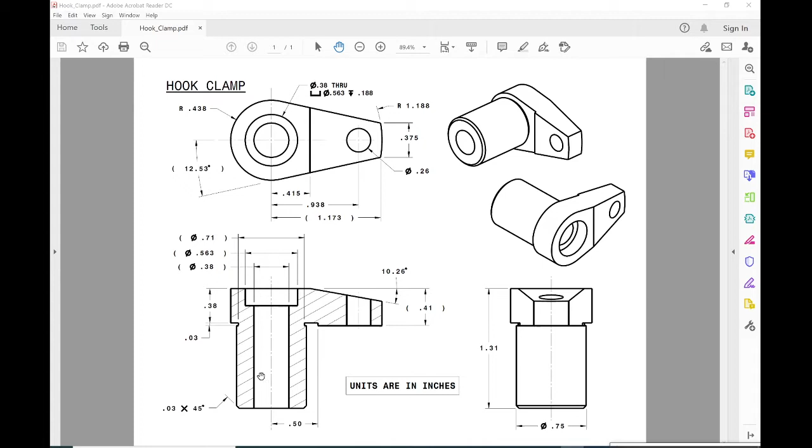Hook clamp. Okay, we're going to start by working on this sketch here. We'll draw this portion of the hook clamp first, then focus on the shaft, and at the end we'll draw the counterbore hole and this simple hole.

Okay, so let's take a look at the sketch. When we do our sketch, we're going to draw our arc about the origin, with a radius of 0.438. Let's go to CATIA and draw a sketch on the XY plane.

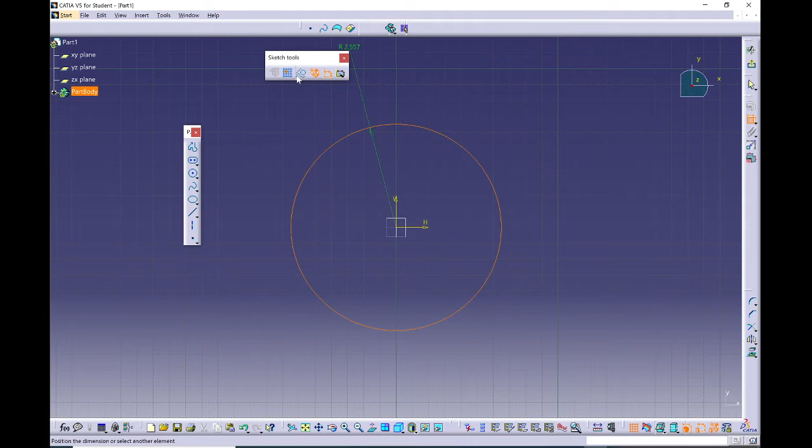We're going to draw a circle at the origin. Let's add a dimensional constraint. Double click on it. If yours is set to diameter, switch down here to radius and type in 0.438. There it is. Let me zoom in.

All right, let's go back to the PDF file. The next thing we're going to draw is these lines. We have angles, but they're in reference, so we're just going to draw lines and use these dimensions to define them. Let's go back to our sketch.

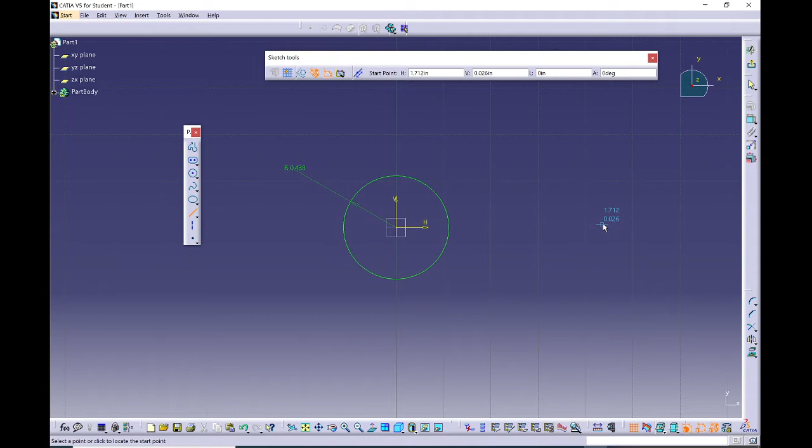I'm going to use the line command and just guesstimate the location. I'm going to overextend, click, then go tangent to that line or to the circle. There it is, and let's repeat the same thing on the bottom. It's not going to be exact at first, but we'll fix it with our constraints. Then barely touch the circle so it'll create a tangency constraint. And there it is.

Okay, now maybe you haven't used the eraser command. Let's dock these toolbars back into place. Here we have the eraser. I'm going to double click on it. Oh, I only clicked once—let me deselect, double click. I'm going to do multiple erase deletes, just double clicking on the eraser. I'm going to remove this portion of the arc, remove that portion, and this portion. We could have also used trim extend, but I wanted you to be aware of this eraser—it's a quick delete command.

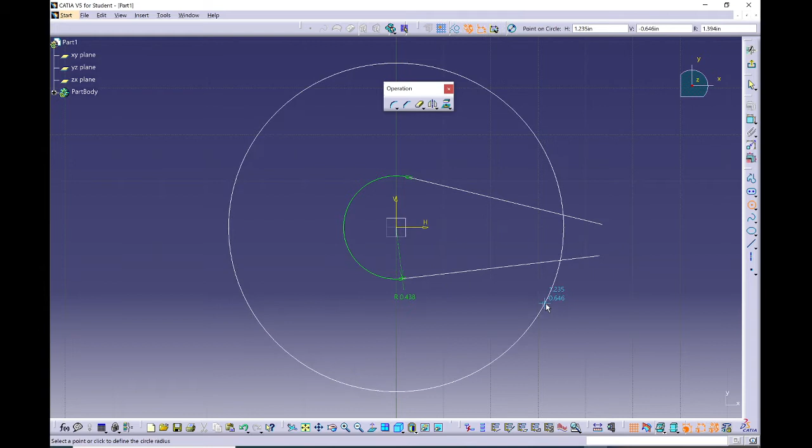All right, let's go on to the end of this. Let's go back to the drawing. We have a radius of 1.188. Let's draw a circle at the center with a radius of 1.188. Now let's draw the next circle at that same center point, typing in a radius of 1.188 and enter.

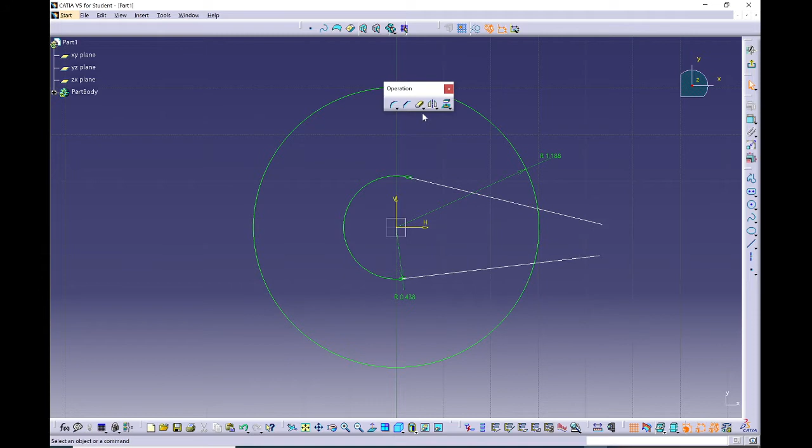Okay, so now we can do the same thing with the eraser. Double click, remove the portions you don't want. I misclicked, let's double click again. There it is. We don't want this portion, nor this portion. Okay, hit escape to deselect.

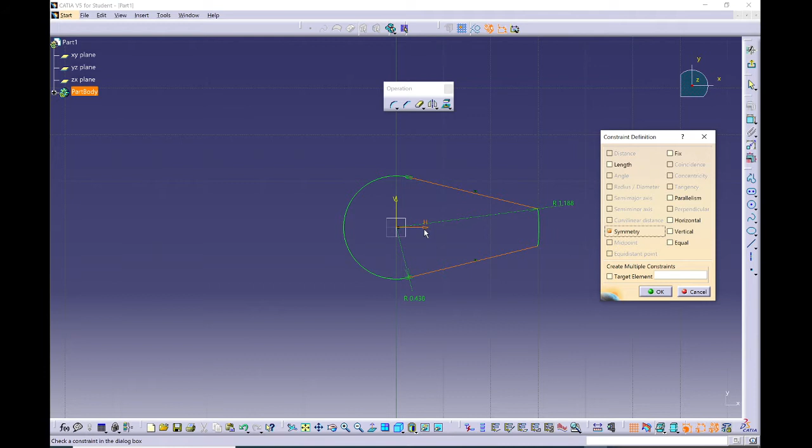One thing I'm missing is I need symmetry between these two lines with respect to the horizontal axis. In case you weren't aware, H stands for horizontal axis and V for vertical axis, and the intersection is the origin. Now I'm going to pre-select these two lines, and lastly select the line of symmetry, which is the horizontal axis. Then I'll apply a symmetry constraint, and there it is—it added the symmetry constraint. Always pick your elements first while holding the control key, and select your line of symmetry last.

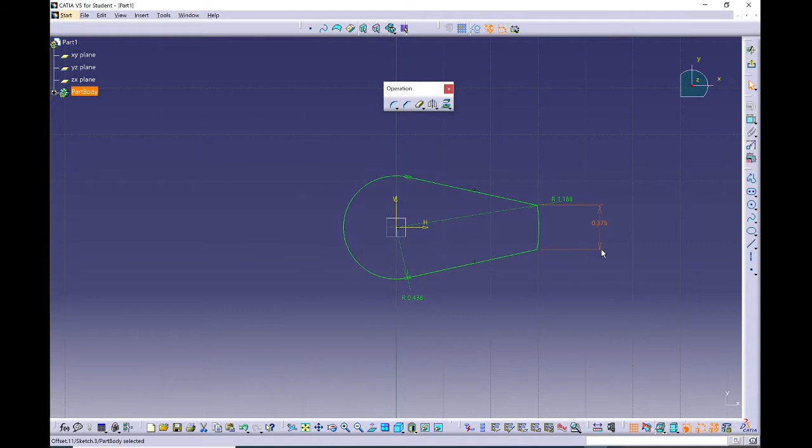Now let's add our dimension of 0.375, from this point to this point, and enter. There it is—that's all we needed for this sketch. Let's do a tool sketch analysis just to double check everything looks good. Everything's closed, as you can see. Let's go ahead and exit.

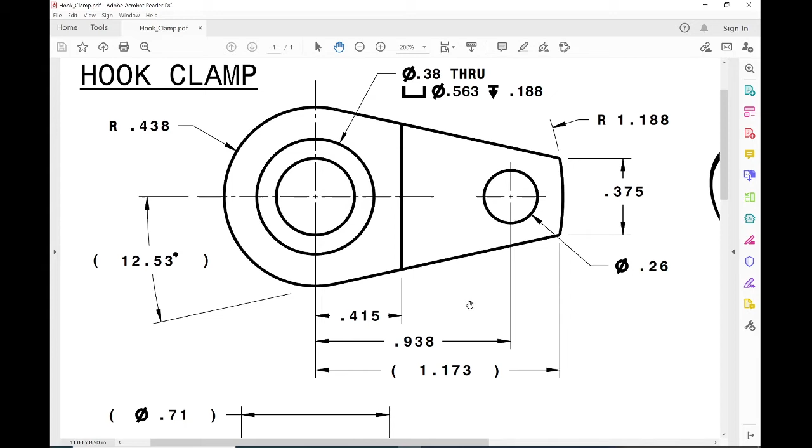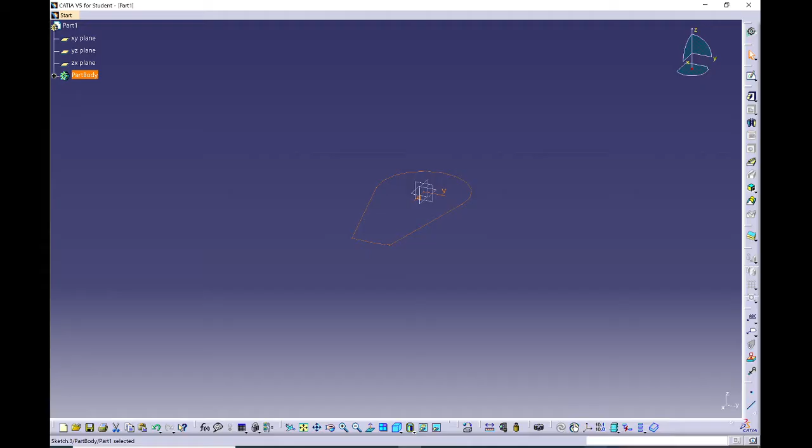All right, now I'm going to do a pad. This tells us it has an overall height of 0.41. So I'm going to pad 0.41, which is just 0.38 plus 0.03, equaling 0.41. This is in parentheses as a reference because it would be double dimensioning with respect to these two dimensions. So we'll do a pad of 0.41.

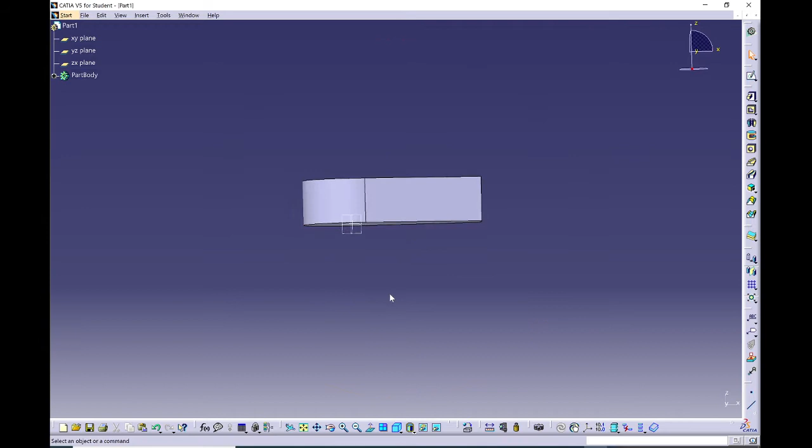Okay, there it is. Let's rotate. Again, I'm trying to use the axis here for later, for using other commands where we can use symmetry and rotate about this axis when we create our shaft. All right, now let's focus on this view.

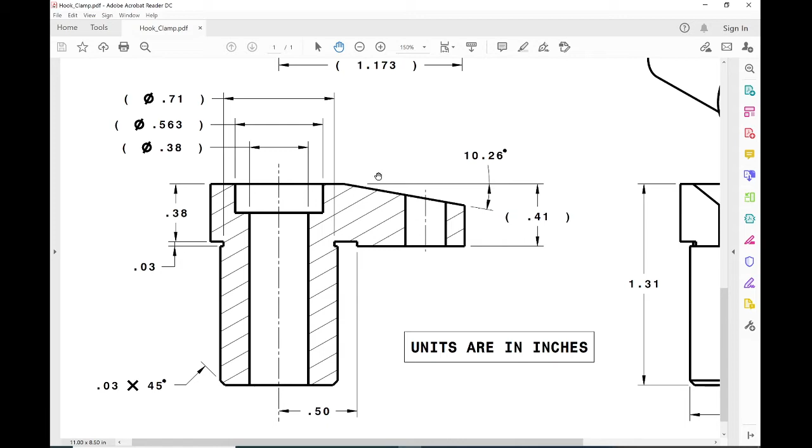Okay, so I need to create this cut here, and I'm going to create a cut here. I'm going to draw a rectangle to remove this portion of it, and then I'm going to draw a triangle to remove this portion of the pad. Okay, so let's start with this one. We're going to need help from the top view.

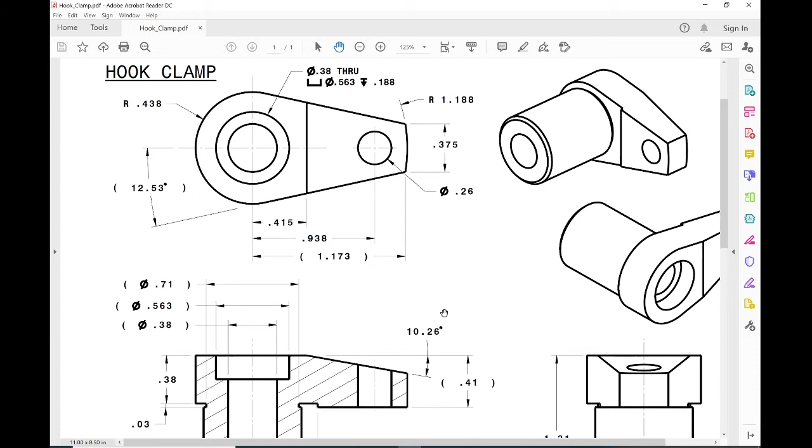All right, so we're going to draw a triangle, which is 0.415 from the axis. So from this axis to this point is 0.415. Okay, and then we're going to go downward at an angle of 10.26.

All right, so we're going to draw a sketch on this plane so we can remove this portion, and then we'll come in and do a rectangular cut all in one sketch. Okay, so let's go ahead and sketch.

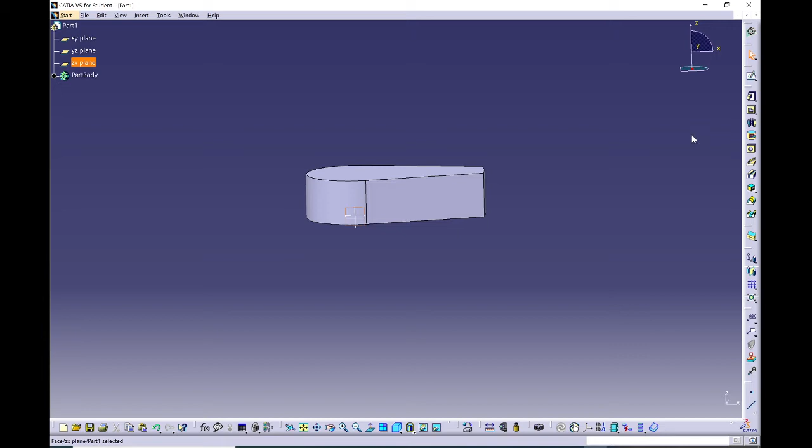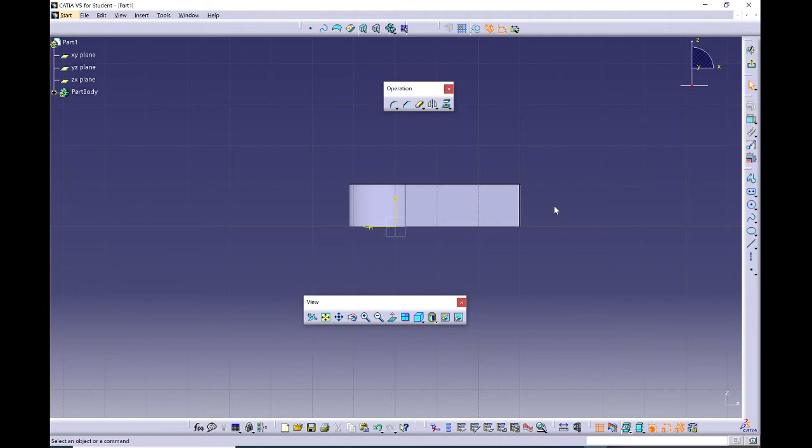Now I want this on the other end, so I'm going to hit the normal command. Normal view, click on it, it'll straighten it out. Click on it again and it'll rotate it. As you can see, it flipped it 180. Okay, so we're going to draw that triangle. Double click to dock it back in place.

Okay, so I'm going to draw a triangle. I'll use the profile command. I'm just guessing on the dimensions. Okay, there it is. Click in space to deselect.

I'm going to project this edge. Okay, so let's use project. And click in space. Now I don't want this projected element to be a solid line, so I'm going to select it, turn it into a construction line. All right, and click in space to deselect.

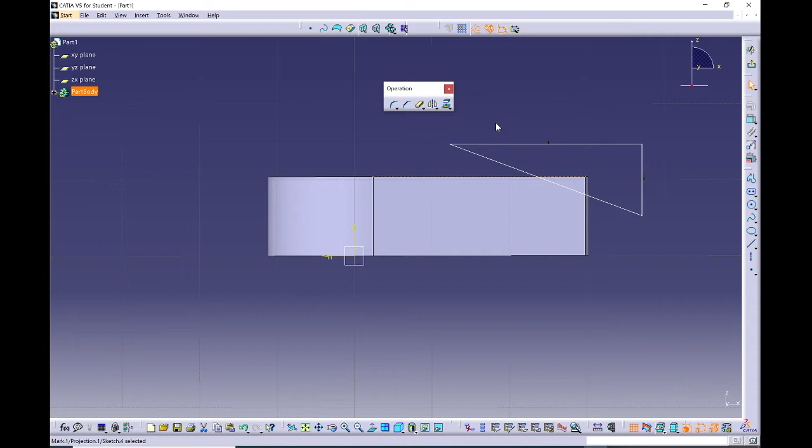So you can see there's a construction element. Let me zoom in a little bit. Click and space. Okay, so we have this construction element, and we're going to put a relationship between that construction element and the horizontal line, and we're going to make it coincident. There it is.

Okay, and then we're going to add a dimension from our vertical to this point. Let's take a look at the drawing again. Okay, so that dimension is 0.415 from the axis to where the slope starts. So from the axis to this point, 0.415. So let's put that dimension from the vertical to this point, and it's 0.415.

And enter. Okay, now we need the angle. Angle is 10.26. Okay, so let's add the angle of 10.26 degrees. Ooh, I misclicked. Let me hit escape. Do it again, from the horizontal to the slope. Double click, and 10.26 is our angle.

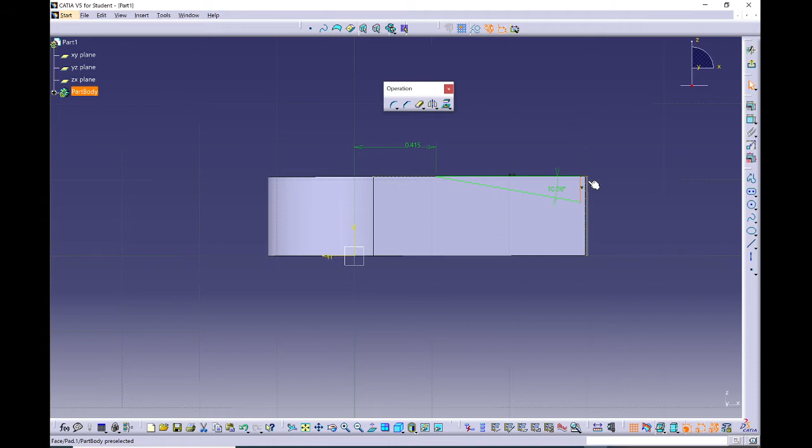Okay, and there we have it. Now notice this is still white, meaning I can extend it. It's okay if we overextend it, it's a pocket. We're going to create a pocket. There's no solid in this area, so this part it'll ignore when I do a pocket. So this length doesn't really matter as long as it's not smaller than the overall length, or as long as it doesn't stay within this edge. We want to go beyond that edge.

Let's go ahead and throw in a dimension, and I'll just type in 1 inch. Okay, so there's our triangle.

Okay, now we're going to do a rectangular profile here, to do the cut, that's right here. Okay, so let's draw a rectangle. Go to rectangle.

We're going to go slightly above. Oh, notice I forgot to get out of construction. I'm going to have to hit escape to exit the command. I forgot to turn off the construction option. Turn it off. Now let's draw a rectangle again.

I'm not going to go to this edge. I'm going to go a little higher because we're going to remove that portion of it. Okay, there it is. All right, so let's go get some dimensions.

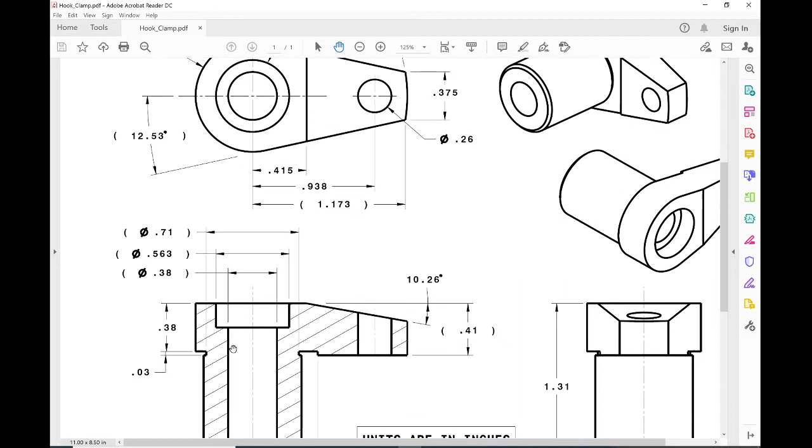Okay, so we're going to remove this portion of it, which is 0.03. So 0.03, and then we're going to put a dimension of 0.50 from the axis to this point.

Okay, so we're going to put a dimension from the horizontal to this line. Dimension. There it is, to the horizontal. And let's change it to 0.03. So that's the undercut, 0.03.

Then a dimension from the vertical axis to this vertical line. Let's take a look at that dimension again, which is 0.50.

Okay, 0.50, enter, there it is. Now the length of this doesn't really matter as long as we go through the solid. So it can be this short, it can be longer. We don't want it inside the solid because we're removing this entire portion of it.

Okay, so let's extend. I'm going to just throw in some dimensions. Doesn't matter, I'll go 0.25 on this one. And for this length, I'll just type in 1. It doesn't matter.

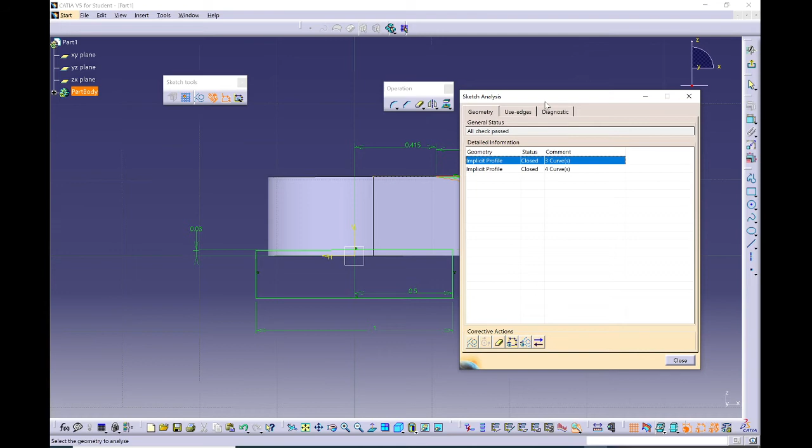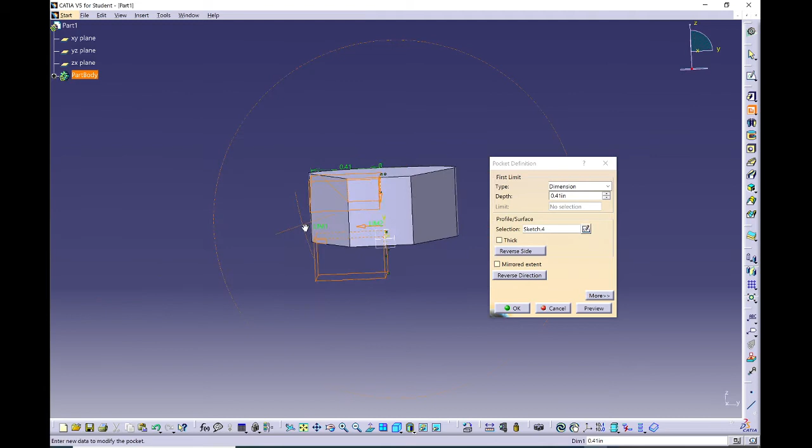Close, let's exit, and let's do a pocket. Okay, so as you can see, we have our sketch. Let's do a pocket. And as you can see, it's going to cut through the solid. I don't know how much length I need, so I'm going to just type in 1. Preview, it's okay if you overcut.

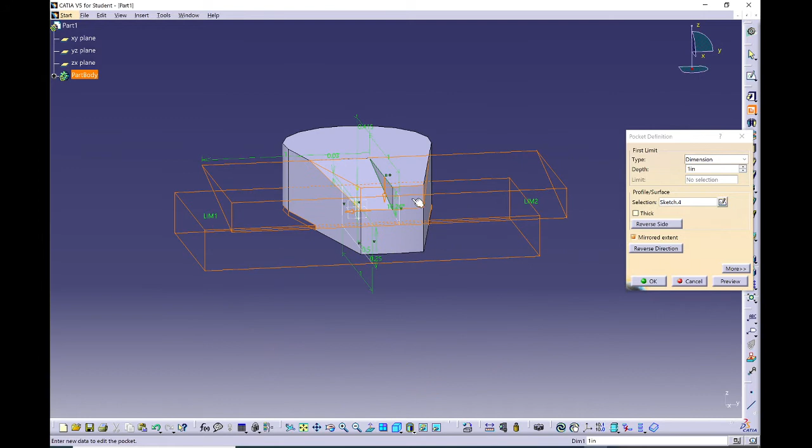Notice it's only cutting one portion of it, so we need to also go with mirror. If we click on the mirror option, it'll also cut in the other direction. There it is, so it's going 1 inch in each direction, and hit OK. And there it is, so we have our pocket and our pocket.

Okay, so there's our top portion of the hook clamp. Now what we need to do is create our shaft. So let's take a look at the shaft.

Okay, so we're going to draw this profile. We have a shaft with a diameter of 0.75. We have a diameter of 0.75, and we're going to draw this profile. We're just going to do it with a rectangular shape, and then we'll revolve.

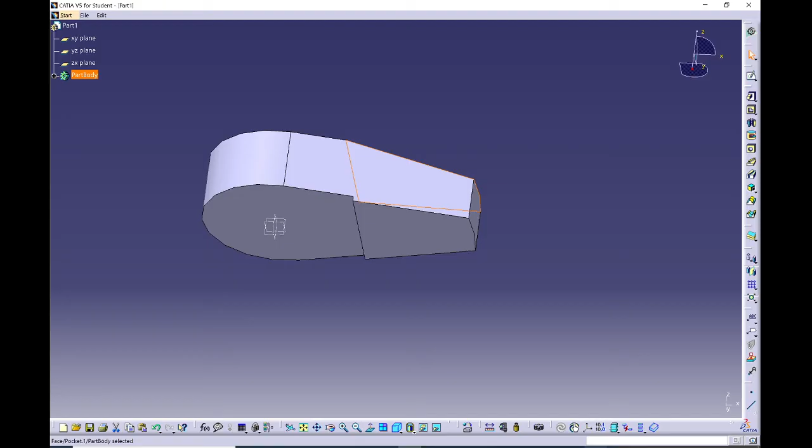Okay, so just like the last sketch, we're going to sketch on this plane, which is the ZX plane. Create a sketch. Let me hit normal to rotate it 180. There it is.

All right, so we're going to draw this. I'm going to project this over, grab this edge, project, hit OK, and change it to a construction element. Click in space to deselect. You can see it's a construction element. Once you deselect it by clicking in space or hitting escape, go back and turn off the construction option.

All right, so let's go ahead and draw that profile. Okay, let's go back, so we're going to draw this profile. And for now, we'll just guesstimate the size. So we're only going to draw the left hand, we don't need to draw the right hand.

We're going to do a revolve. So let's use profile. For now I'm just guesstimating the location. Let me go ahead and zoom in.

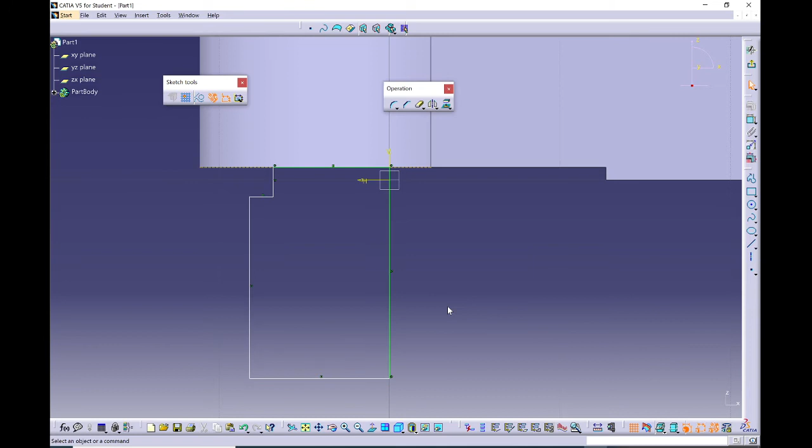We'll come back and take care of the chamfer. Go all the way to the middle, make sure it's horizontal. Okay, and there it is, we have a closed profile. Click in space to deselect or hit escape.

Okay, so we know this is an undercut of 0.30. Okay, so the undercut is 0.30 — my mistake, 0.03. Enter, there it is.

We know the diameter, if we go back to the drawing, is 0.75. We're going to cut it in half because we're only drawing half of it. So let's go ahead and throw in that diameter. It's going to be 0.75 divided by 2. So I'm going to double click, type in 0.75 divided by 2.

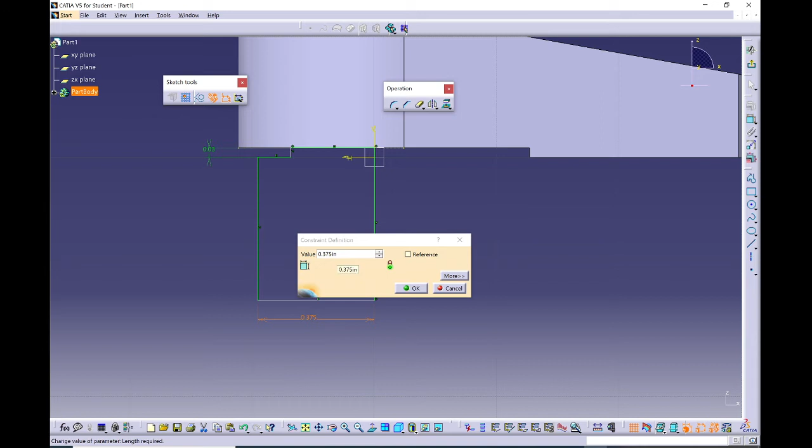Let's see, clicking away. Oh, let me type it in again. 0.75 divided by 2. Try it again, click away. There it is, 0.375. So I inputted the wrong number earlier. It's 0.75 divided by 2, which is 0.375, and OK.

All right, now we need an overall length, and we also need the location for this one. Let's go back to the drawing. Overall length is 1.31. So let's throw in a dimensional constraint from the top to the bottom of 1.31.

Enter, there it is. And we still need to locate this line here. Let's zoom in a little bit. Okay, we still need to locate this line. All right, so...

Here it is, we have a dimension of 0.71. So we're going to take 0.71 — that's the diameter from here to here — and divide it by 2.

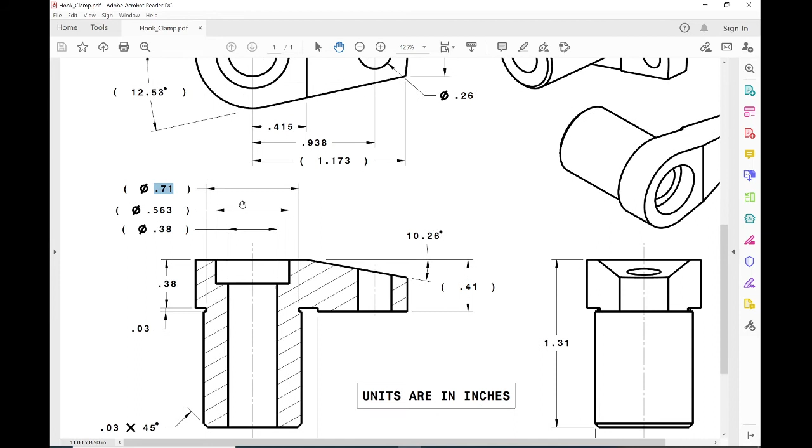Okay, so let's throw in that dimension of 0.71. Double click, type in 0.71 and divide by 2. Click away, let CATIA do the math for you. So it's 0.355, and OK.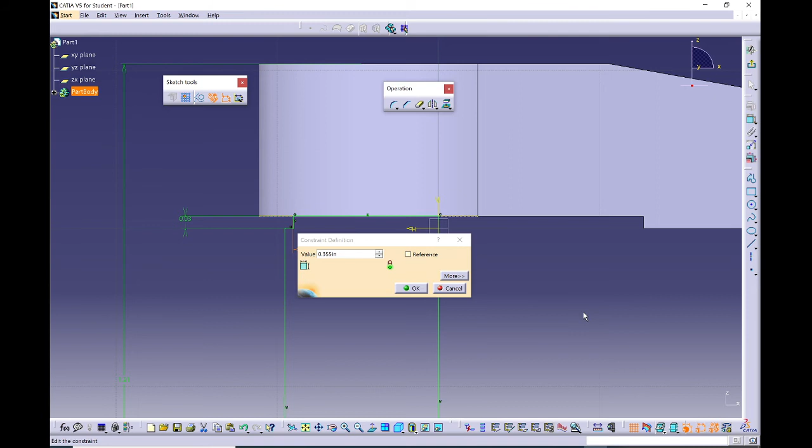And there it is, we have our sketch. Do a tool sketch analysis — everything is closed and we're good.

Okay, now when we exit the sketch, we're going to do a revolve about the vertical. Let's find it in the tree, this vertical axis, right click, center graph. There it is. So here's our sketch, here's our vertical. We're going to revolve around this vertical axis. Let's go ahead and exit the sketch now.

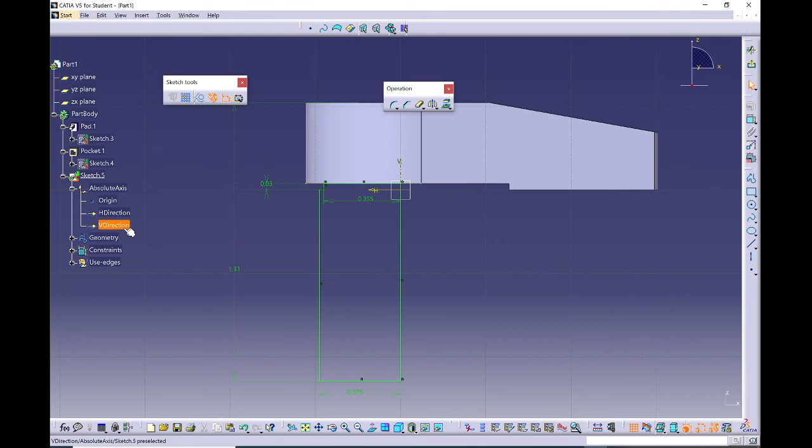All right, so we're going to take this one out. Okay, so we're going to go ahead and do our revolve, and they call it shaft. So for a solid, it's called shaft. I think when you do a surface, it's called revolve or revolute.

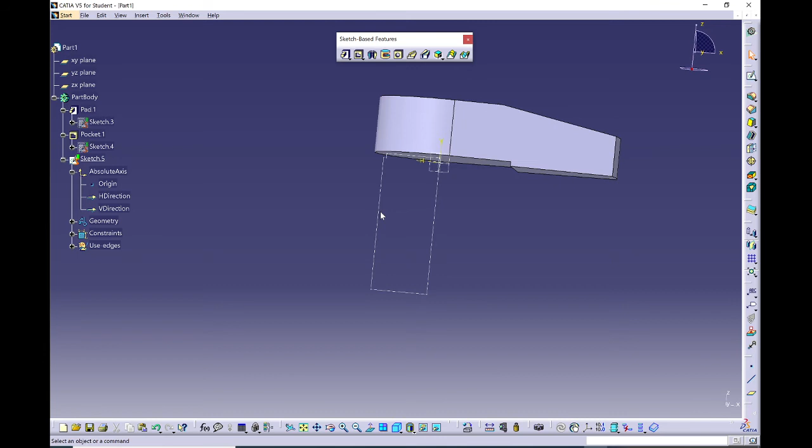Okay, so let's go ahead and do a shaft. We're going to rotate about the vertical. Let's go ahead and select the sketch, and we're going to do a shaft of the sketch, and let's pick our axis. As you can see here in blue, it's asking for the axis. The axis is going to be that vertical axis. You can see it here, the vertical.

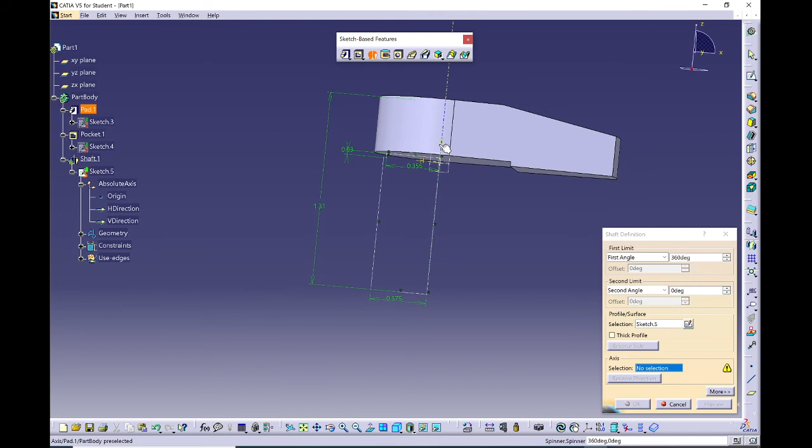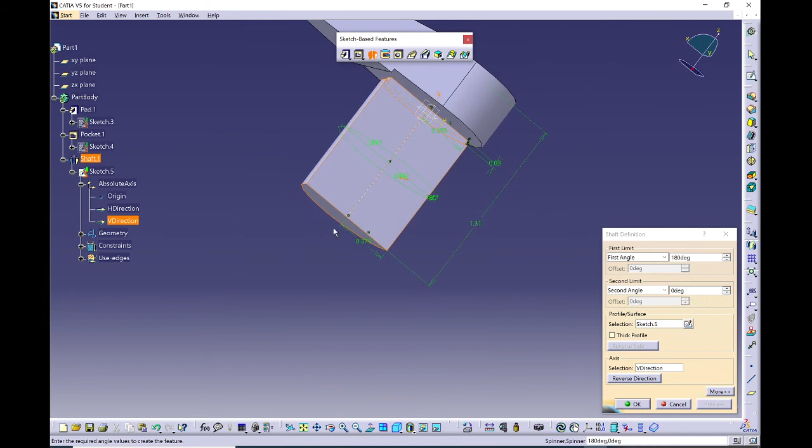And it's rotating 360 degrees. You can change the angle. Let's hit preview, so that's 360. Let's see what happens when we type in 180. Preview, that's 180 degrees, but we want 360. So let's type in 360 and OK.

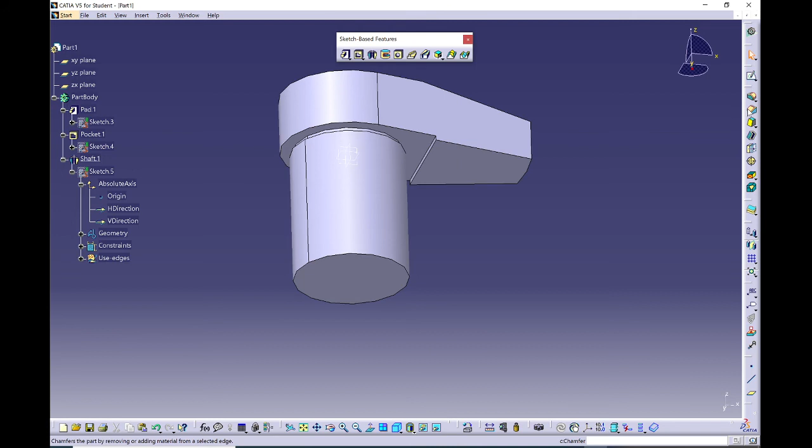All right, so we're almost there. Let's go ahead and put the chamfer here on the edge, on the bottom edge. Our chamfer is 0.03 by 45 degrees. So let's go ahead and do a chamfer on the edge. Once again, it's 0.03 by 45 degrees. Preview, there it is. And OK.

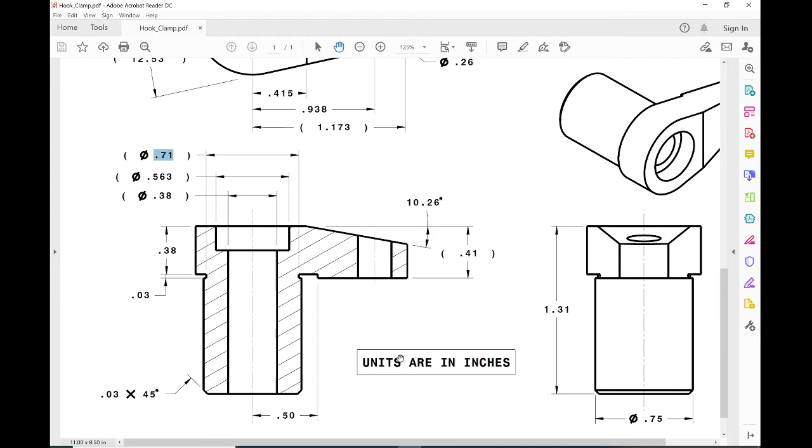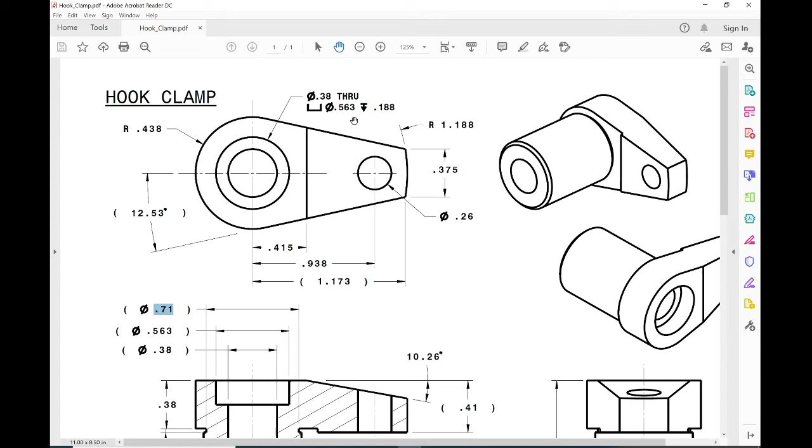And now we need the holes, and we're done. Let's do a hole here on top. Okay, so we have a counterbore hole. Even though it's pointing to the large circle, you always call out the little one first. The small hole is 0.38. Then we have a counterbore larger diameter, so you call out the larger diameter second. That's this circle, 0.563, and a depth of 0.188. So once again, this hole has a diameter of 0.38, this one 0.563, depth of 188.

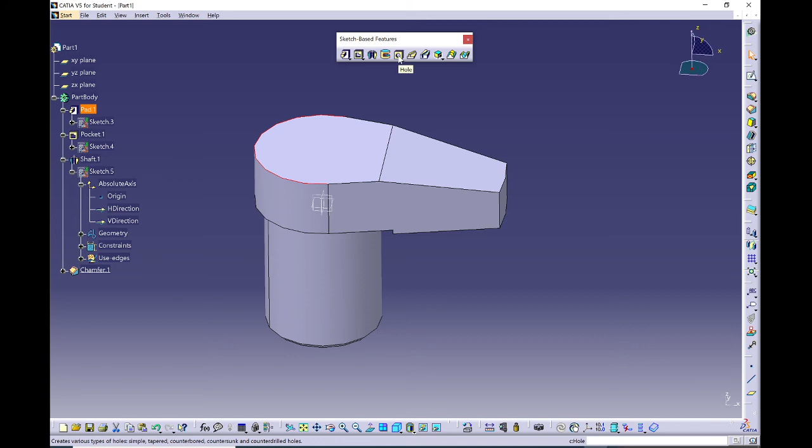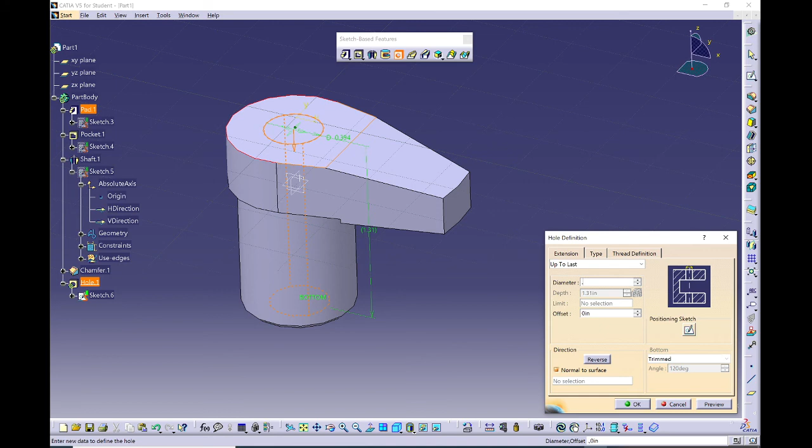Okay, so we're going to pre-select this edge, do the hole command, click the surface. We're going to go all the way through, go all the way to last, all the way through, so it goes all the way through the entire solid. Once again our diameter, 0.38, we always do the first hole first, the small hole first, 0.38. Preview, there it is. So we have a 0.38 diameter hole going all the way through.

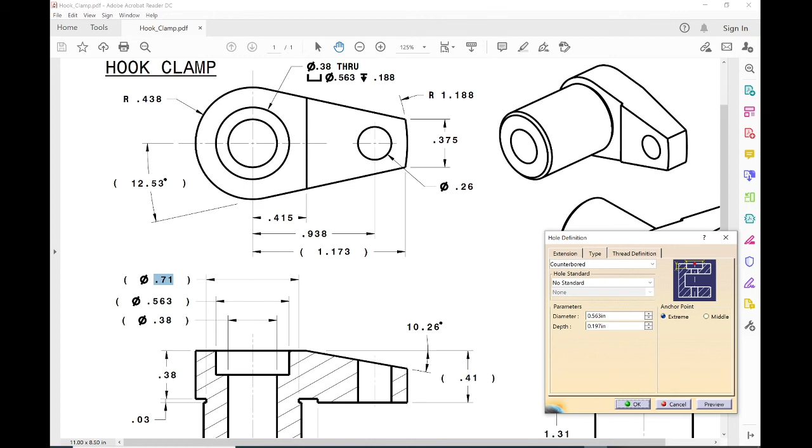Okay, now we're going to go to type. Let's go to the second tab, type, and instead of a simple hole we're going to create a counterbore hole. You can see it's already generating the second hole. The diameter for that one is 0.563, and we have a depth of 0.188. Preview, and there's our counterbore hole. And OK.

All right, so we're done with the counterbore hole. All we have left now is the simple hole. The simple hole is at 0.938 from the axis. Now this is going to be a little bit difficult. We either have to create a sketch to create this hole, or we need to put a point in space and dimension from that point to locate this hole at 0.938. We'll just do a simple sketch.

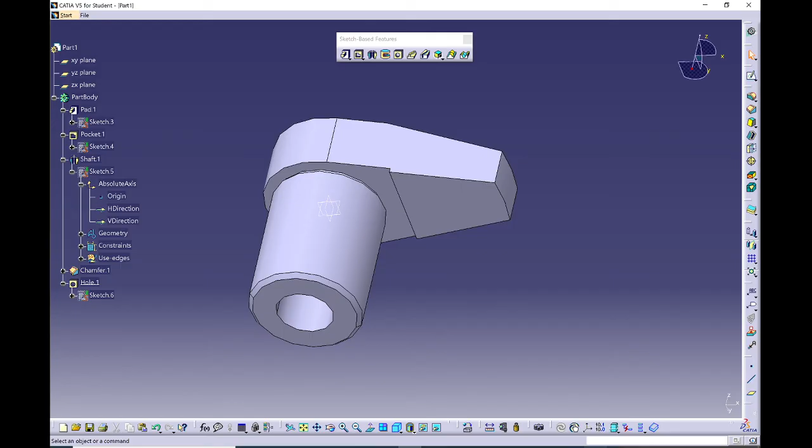Okay, so we'll do a sketch here at the bottom, on this surface. Again, we prefer to put sketches on planes, but we'll just go ahead and put it on the solid plane or solid surface as our sketch plane. So do our sketch, and we're going to place the hole on the horizontal axis. Let's put a dimension from the center to the vertical. Let's go back and get those dimensions: 0.938 and diameter 0.26. This is actually a threaded hole, but I decided to keep it as a simple hole at 0.26.

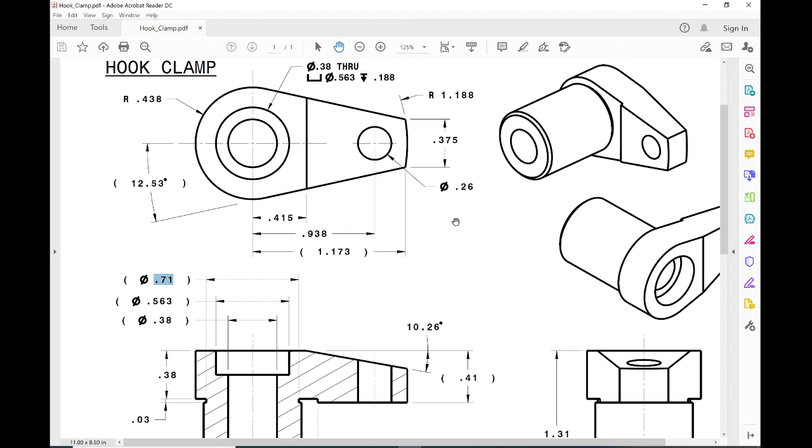Okay, so let's go ahead and put that 0.938 dimension. And let's go ahead and throw in that dimension of 0.26. Oh, should be diameter, let me double click and change it over to diameter. I had radius as the default, 0.26, and enter. There it is. Okay, do a tool sketch analysis, everything's closed, everything looks good. Let's go ahead and exit.

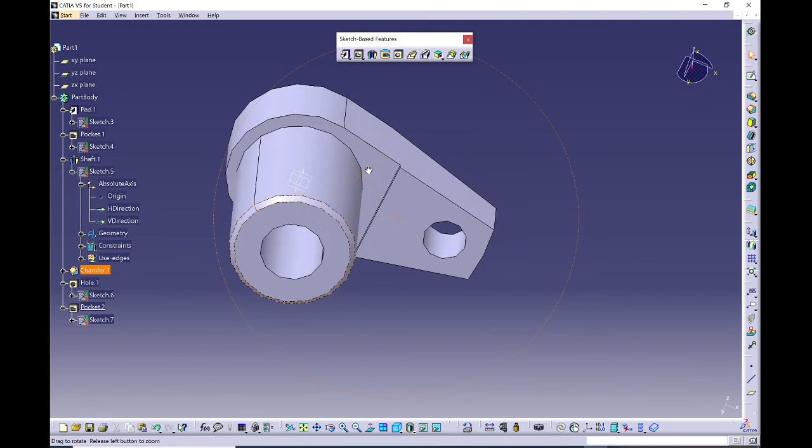And let's do our pocket. So here's our pocket command, and go all the way up to last, go all the way through it, all the material up to last, and okay, and there's the hole. And we're done with the hook clamp. Once again, this is actually supposed to be a threaded hole at the assembly level. We're later going to install this into an assembly and attach a threaded shaft to this hole, which is supposed to have threads, but we'll just keep it as a simple hole. That's it, hook clamp, end of video.